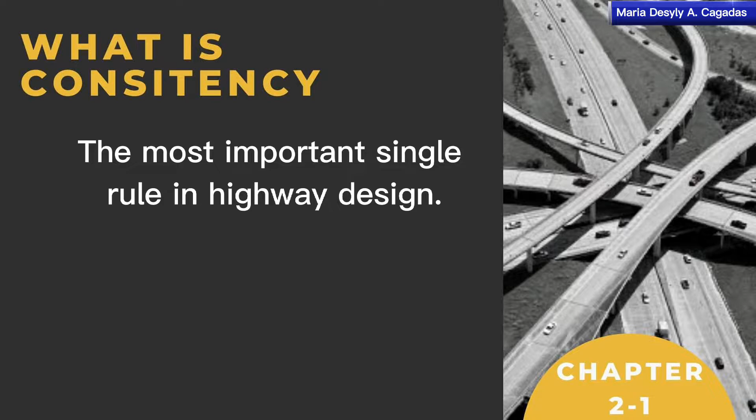Let's start with the word consistency. What is consistency? It is the most important single rule in highway design, making every element of the road conform to the expectation of every driver. Drivers expect the highway agency to provide them with clear information and guidance through a variety of road signs, and to avoid abrupt changes in traffic as well as road standards.

Let's go on to the definition and terms. AASHO, or American Association of State Highway Officials, was established in 1914 as an association of state, territorial, and District of Columbia Highway Departments and the Federal Highway Administration. The name was expanded in 1973 when the Department of Transportation was integrated into the association, renaming AASHO to AASHTO.

AASHTO means American Association of State Highway and Transportation Officials. Its engineering activities are implemented by standing committees tasked with preparing specification manuals and standards representing current highway engineering practice.

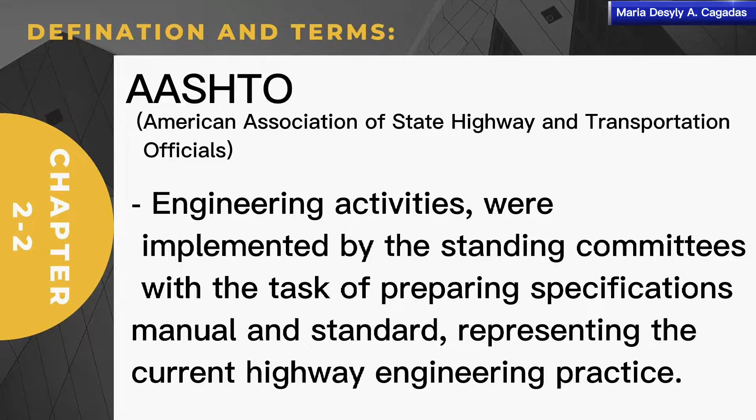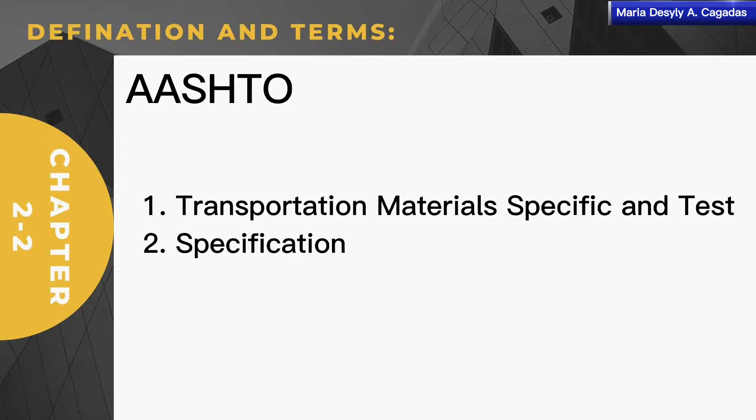The AASHTO publication includes, first, transportation materials specification and tests; second, specification of highway bridges; third, geometric design standards; and last, numerous policy statements and guidance.

Let's go on to roads and highways. These are defined as strips of land that have been cleared and further improved for the movement of people and goods. Road has a somewhat broader application in usage, while generally used to describe a public thoroughfare, it can also refer to railways.

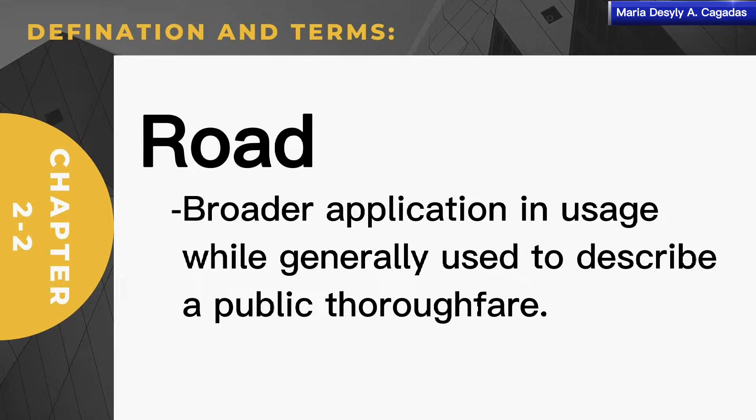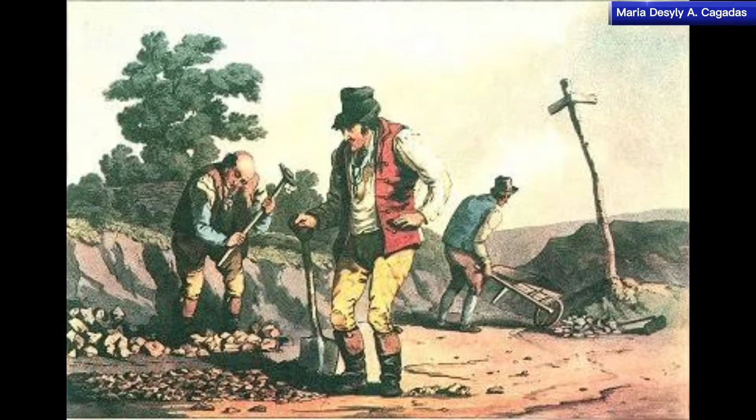Highway: the term was first used in England to describe a public road built by digging ditches on both sides and heaping up the earth in the middle, creating a level higher than the adjacent land.

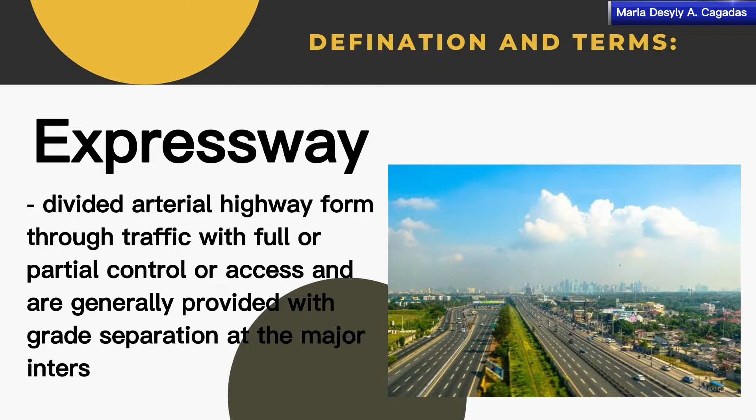The next one is expressway. It is a divided arterial highway for through traffic with full or partial control of access, generally provided with grade separation at major intersections.

Freeway is an expressway with full control of access. So what is control of access? It is a condition where the right of owners or occupants of adjoining land, or other persons, to access, light, air, or view in connection with a highway are fully or partially controlled by public authority.

There are two kinds of control of access: full control of access and partial control of access. Full control of access is where the authority to control access is exercised to give preference to through traffic by providing access connection to selected public roads.

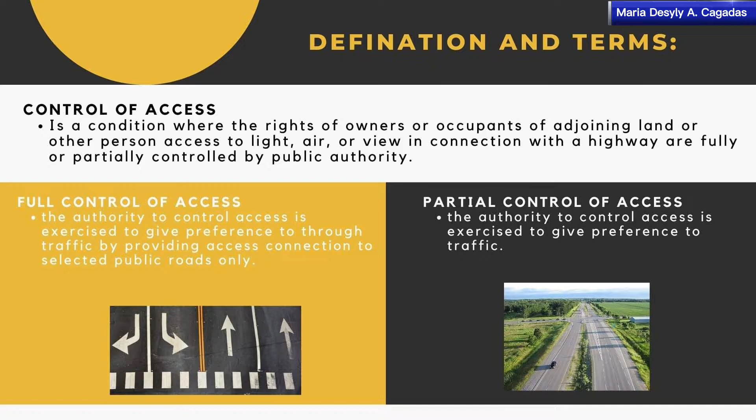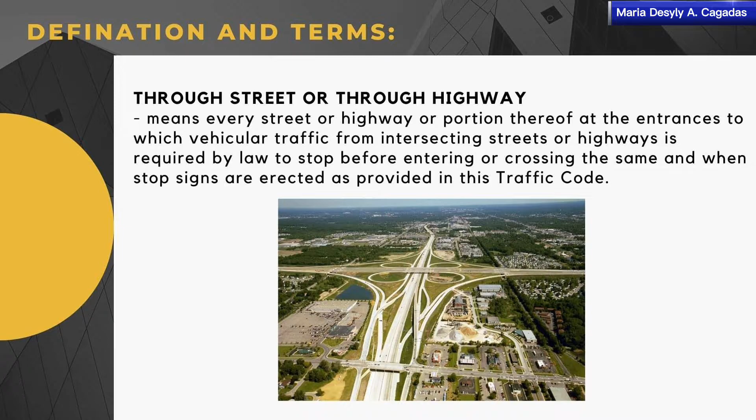Partial control of access is where the authority to control access is exercised to give preference to traffic through a street or highway. This means every street or highway, or portion thereof, where vehicular traffic from an intersecting street or highway is required by law to stop before entering or crossing, and where stop signs are erected as provided in the traffic code.

Parkway: it is an arterial highway for non-commercial traffic with full and partial control of access, usually located within a park or urban park-like development.

Arterial street: it is an arterial route that carries traffic to the nearest access point or through traffic. It is also considered a make-do substitute for a control access facility with volume exceeding about 20,000 vehicles per day.

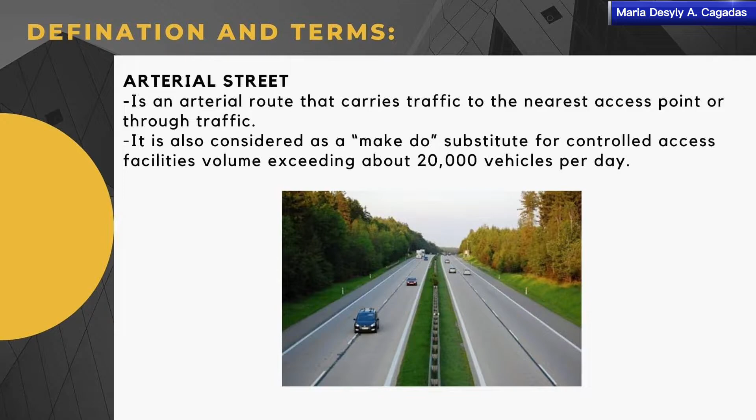Collector street: from a smaller mesh grid pattern where passengers are picked up from service streets and carried to the arterials. Large commercial enterprises or amusement facilities like drive-in theaters are mostly fronting arterial roads.

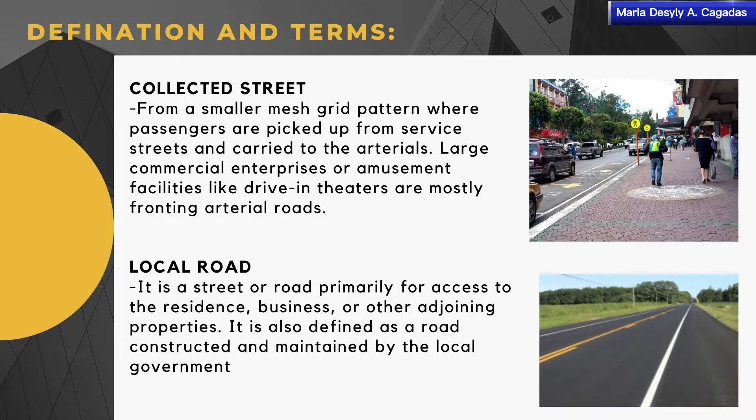Local road: it is a street or road primarily for access to residents, businesses, and other adjoining properties. It is also defined as a road constructed and maintained by the local government.

Highway capacity is defined as the minimum number of vehicles that are reasonably expected to pass a given point over a given period of time, usually expressed as vehicles per hour. There are two conditions: first, under ideal conditions, one lane can carry about 2,000 passenger cars per hour; second, a two-lane road can carry up to 1,000 passenger cars per hour in each direction.

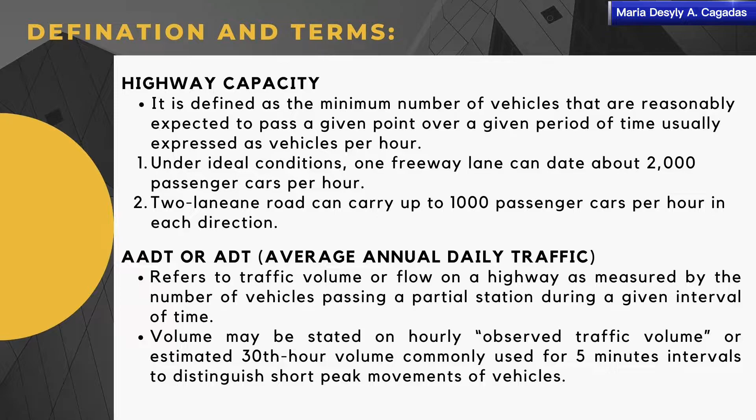AADT or ADT, average annual daily traffic, refers to the traffic volume or flow on a highway, measured by the number of vehicles passing a particular point during a given interval of time. The AASHTO practice classifies highways first as either urban or rural.

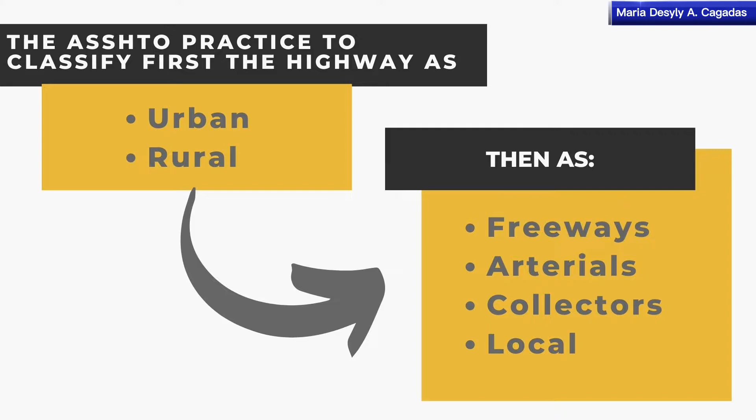Then, after that, they will classify it as freeways, arterials, collectors, or just a local road.

Cross-section of a typical highway. The cross-section of a typical highway has a latitude of variables to consider, such as: first, volume of traffic; second, character of the traffic; third, speed of the traffic; and lastly, characteristics of the motor vehicle and of the driver.

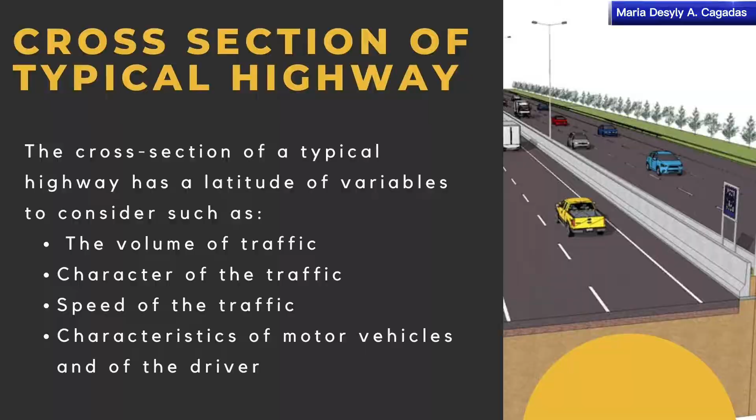What is a road shoulder? It is the portion of the roadway between the edge of the traffic lane and the edge of the ditch, gutter, curb, and side slope. The AASHTO requires that its usable pavement width and shall be strong enough to support vehicles.

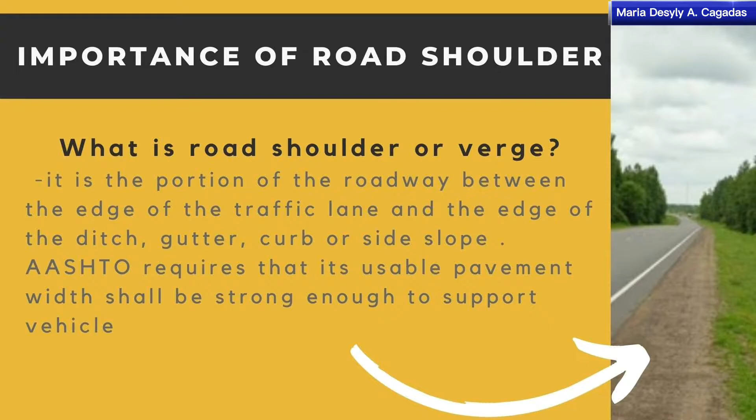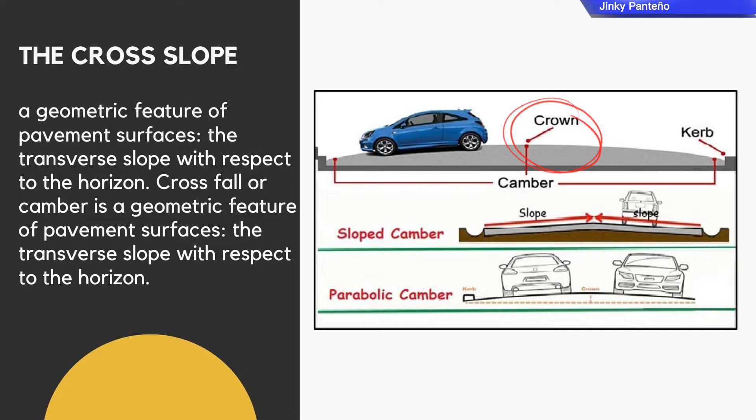To continue the discussion, my first topic would be the cross-slope design on a highway. Cross-slope is a geometric feature of pavement surfaces, the transverse slope with respect to the horizon. A straight tangent roadway segment is typically designed with normal crown for the sole purpose of providing sufficient drainage of water away from the roadway. The term crown is used to describe the top of cross slope and the percentage of the slope.

For high-type pavement, normal crown has a rooftop shape which peaks in the center of the roadway and falls away from the center line at often 1% and typical rate of 2%. This means for a roadway with 12-foot lanes, the edge of the roadway will be 0.24 feet below the elevation of the center line. This is essential for reducing the likelihood of hydroplaning.

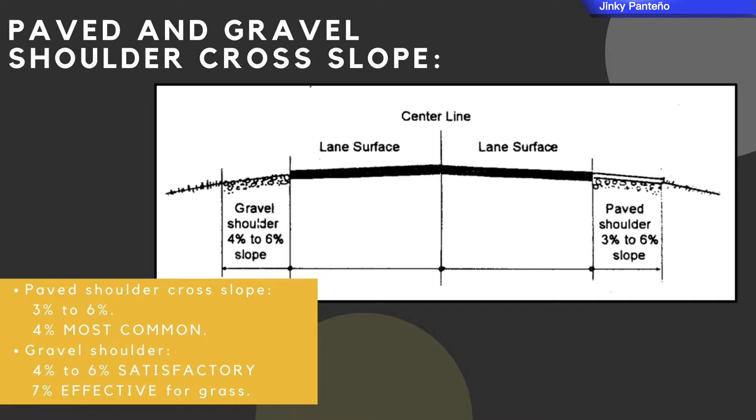As the picture shows, paved and gravel shoulder cross slopes, the side lanes of highways, have different percentages of slopes, wherein paved shoulder cross slope ranges from 3% to 6%, although 4% is the common. For a gravel shoulder, 4% to 6% slope is satisfactory and 7% slope is effective for turf grass surfaces.

On parabolic pavement sections, the parabolic crown surface makes the center line almost flat unless gutters are sufficiently deep to convey water. A combination of uniform slope with parabolic curve is used instead of the parabolic sections.

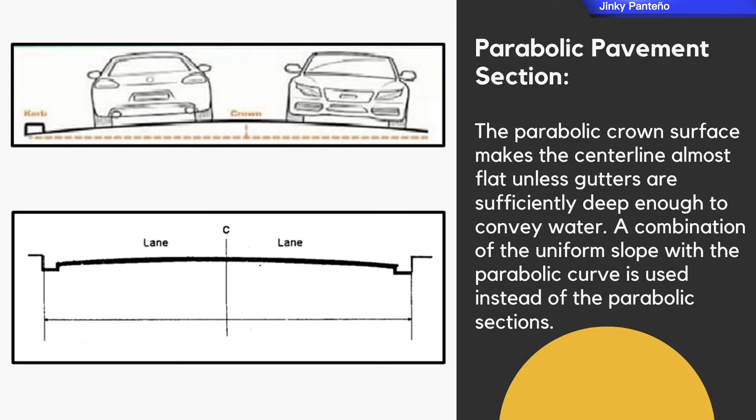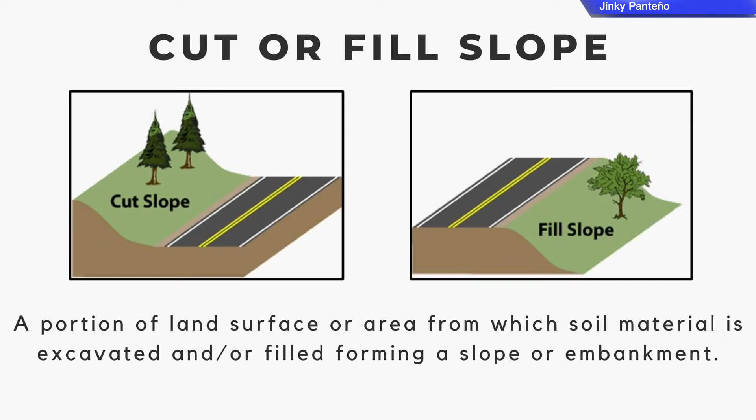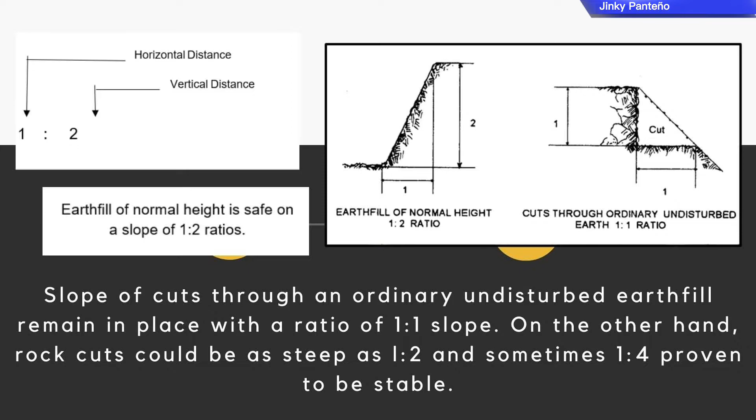Cut or fill slopes means a portion of land surface or area from which soil material is excavated and/or filled, forming a slope or embankment. Earth fill of normal height is on a slope of 1:2 ratio, meaning the first number represents the horizontal distance while the second number is vertical distance. Slopes of cuts through ordinary undisturbed earth remain in place with a ratio of 1:1 slope. On the other hand, rock cuts could be as steep as 1:2 and sometimes 1:4, proven to be stable.

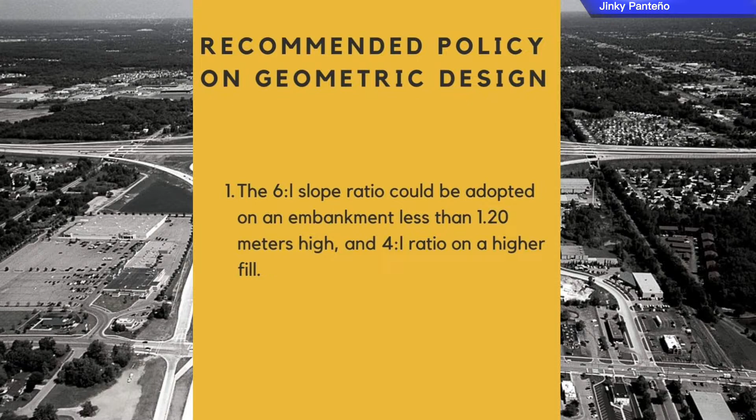There are 3 recommended policies on geometric design. Number 1, the 6:1 slope ratio could be adopted on embankments less than 1.2 meters high, and 4:1 ratio on a higher fill. Number 2, the 2:1 slope is allowed for heights greater than 6 meters. Number 3, cut slope should not be steeper than 2:1 ratio except on solid rock or special kinds of soil.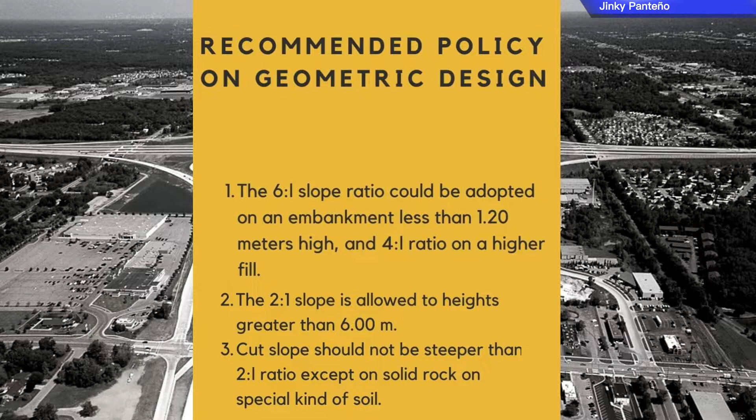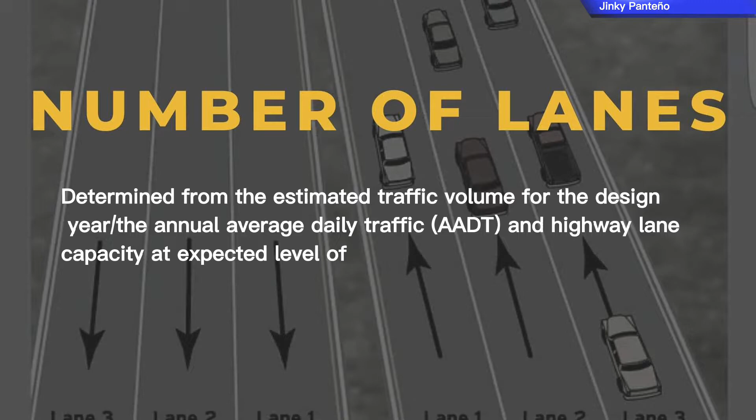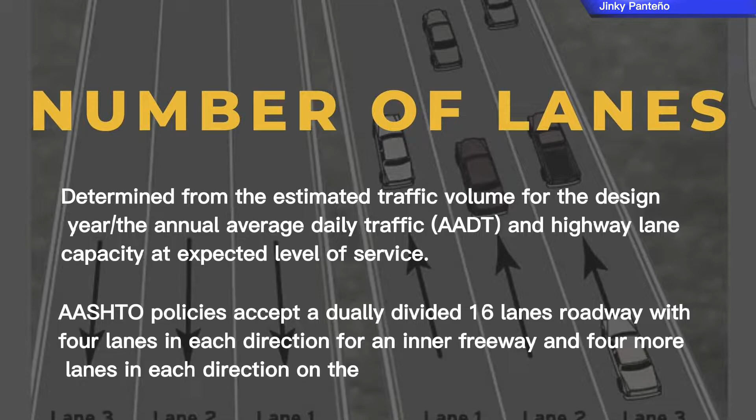Let us now proceed to the number of lanes. The number of lanes in a segment of the highway is determined from the estimated traffic volume for the design year, or the AADT, and highway lane capacity at the expected level of service. AASHTO, the American Association of State Highway and Transportation Officials, policies accept a dual-divided 16-lane roadway with 4 lanes in each direction for an inner freeway and 4 more lanes in each direction on the outside. There are some instances where a reversible lane is located at the center of freeways with unbalanced heavy traffic flow.

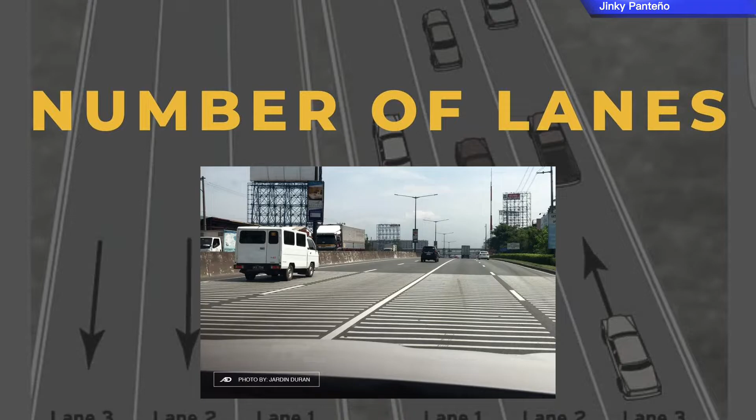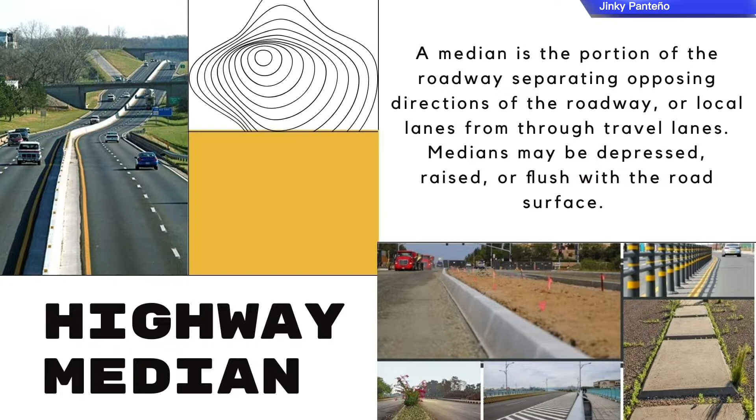Highway median. A median is the portion of the roadway separating opposing directions of the roadway or local lanes from through travel lanes. Medians may be depressed, raised, or flush with the road surface. Here are the 3 most common types of medians used in road construction. Paint lines: a median can be a paint line marked with road studs that separates 2 lanes of traffic that run parallel to each other. Such a type of median is also sometimes referred to as a median strip.

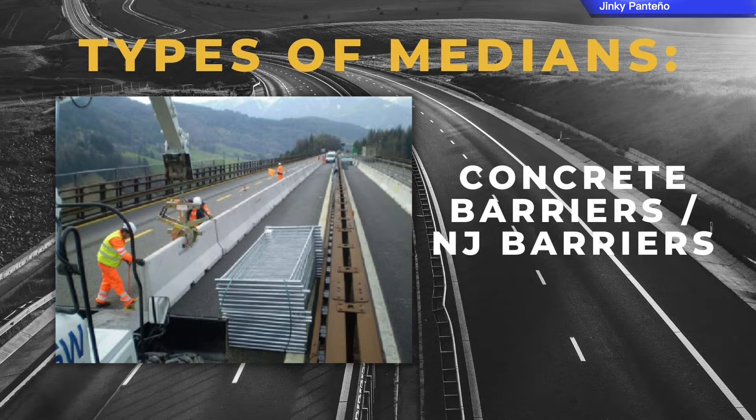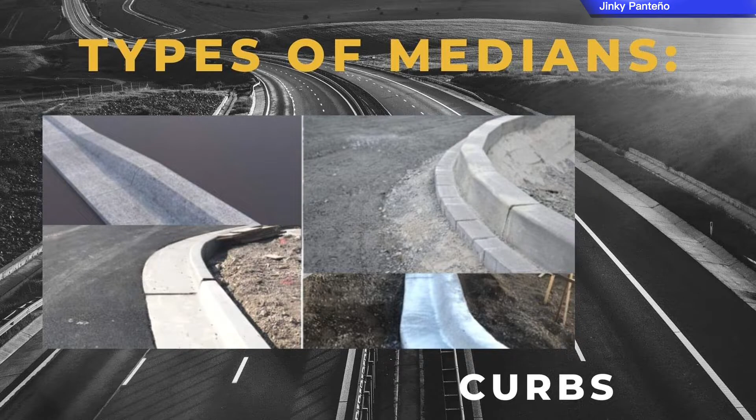Concrete barriers or NJ barriers. One popular median barrier type is called jersey barriers. These barriers, made of heavy-duty reinforced concrete, are designed to stop vehicles and other hazards from crossing over into oncoming traffic. Curbs: curbstones are commonly used as road medians, and these curbstones have to withstand several different weather elements.

Recently, medians in various forms have become an absolute requirement for highways because they offer a variety of advantages, such as allowing drivers to enter and exit highways or roads with less interruption. Medians further reduce incidences of head-on collisions.

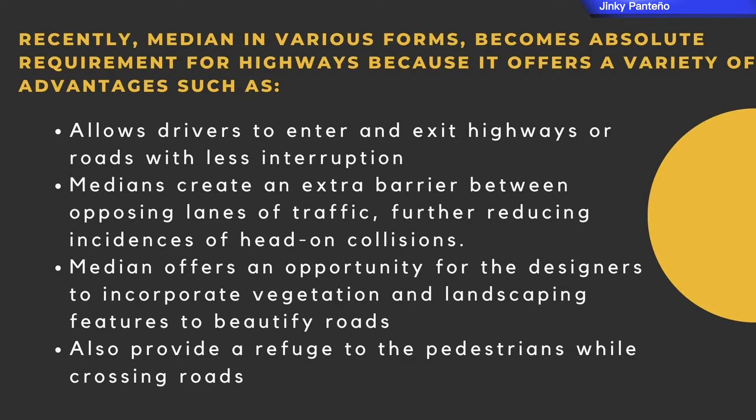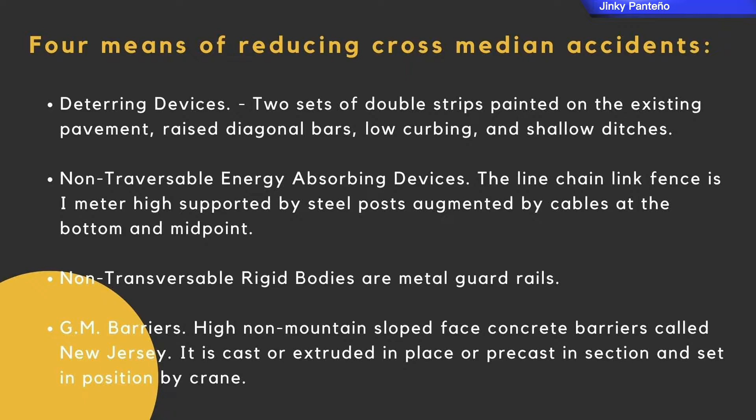Median offers features to beautify roads and also provide a refuge to the pedestrians while crossing the roads. There are 4 means of reducing cross-median accidents: the deterring devices, the non-traversable energy-absorbing devices, the non-traversable rigid bodies, and GM barriers.

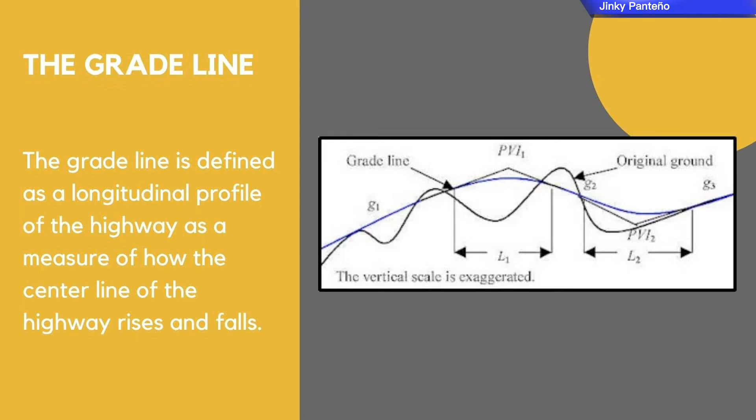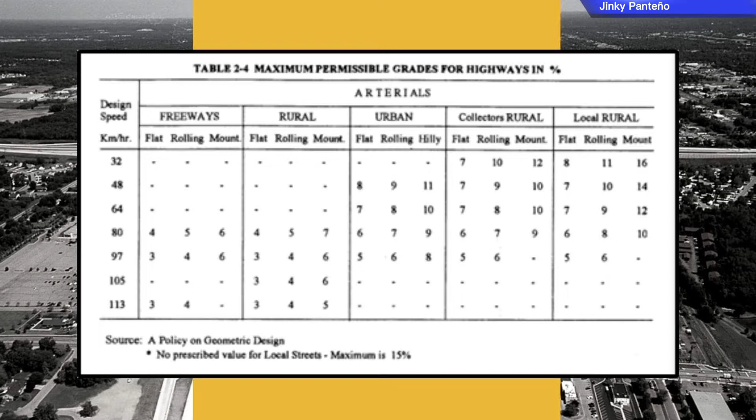Next is the grade line. Grade line is defined as the longitudinal profile of the highway, as a measure of how the center line of the highway rises and falls. The table shows the maximum permissible grades for highways in percent. So there are different grade percents on freeways, rural, urban, collectors rural, and local rural, depending on their design speed.

In laying the grade line, the designer has things to consider. Number 1, earthwork is minimal and consistently meeting sight distances in relation to grade line. Number 2, in mountainous areas, the grade line must be considered, balancing excavation against embankments to get the minimum overall cost. 3, in flat areas, the grade line is set almost parallel to the ground surface but sufficiently above the ground for drainage purposes.

Number 4, undesirable native soil should be provided with sufficient covering. And number 5, grade line elevations along a river or stream are governed by the expected level of flood water.

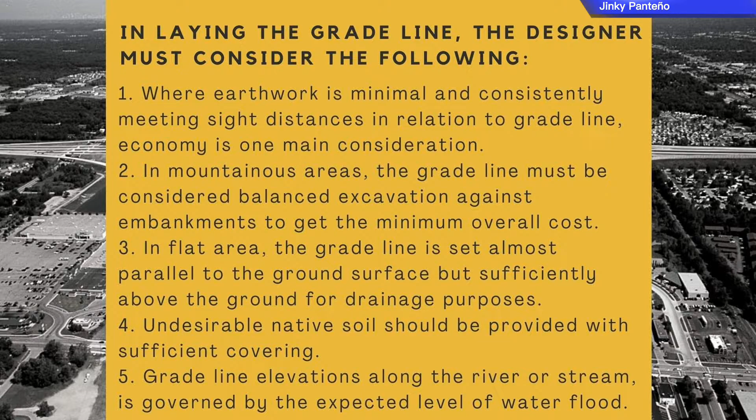Hello, I'm the next reporter, and I'm talking about vertical curve over crest. So there are two curves, crest and sag. So crest is like a hill. So, requirements of the vertical curve over crest. All curves should not be shorter than the established minimum over crest. This is governed by the sight distance requirements, but sometimes riding may demand longer curves than sight distance. Some designers prefer no vertical curve to be shorter than 300 meters.

AASHTO suggested that the minimum curve length varies with the design speed in meters. The distance equals 8 times the velocity in kilometers per hour. So the intermediate point offset is obtained by the maximum correction times the horizontal distance from the end of curve to the point squared, over one half of the length of curve squared.

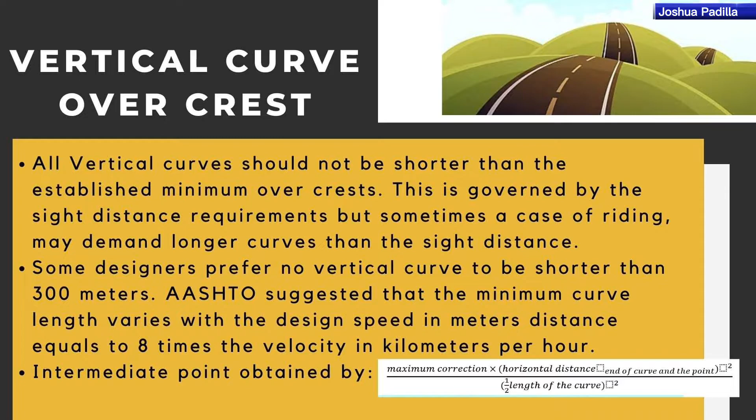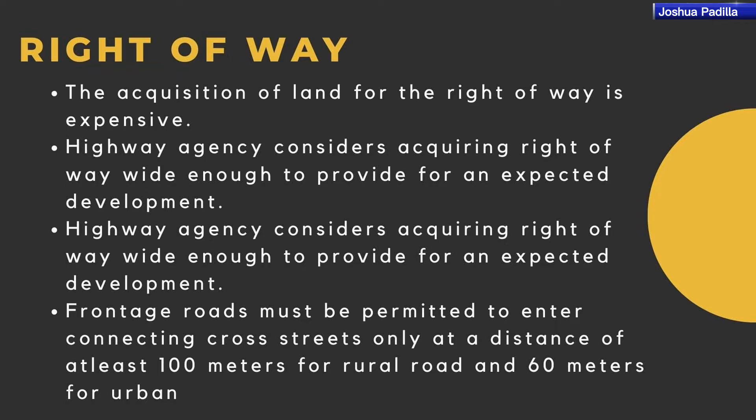So next is the right of way. The right of way is the width of your road. The acquisition of land for right of way is expensive. Highway agency considers acquiring right of way wide enough to provide for expected development. When expressways and freeways are successful, it closes the roadway from direct access to adjoining property. So frontage roads must be permitted to enter connecting cross streets only at a distance of at least 100 meters for rural and 60 meters for urban.

Next is stopping sight distance. What is stopping sight distance? Stopping sight distance is the shortest distance that a driver can see the top of an object 15 cm above the surface. Elements of stopping distance: the distance traveled after the obstruction or object is seen before the driver applies the brake, and the second distance is consumed while the driver applies the brake for the vehicle to stop.

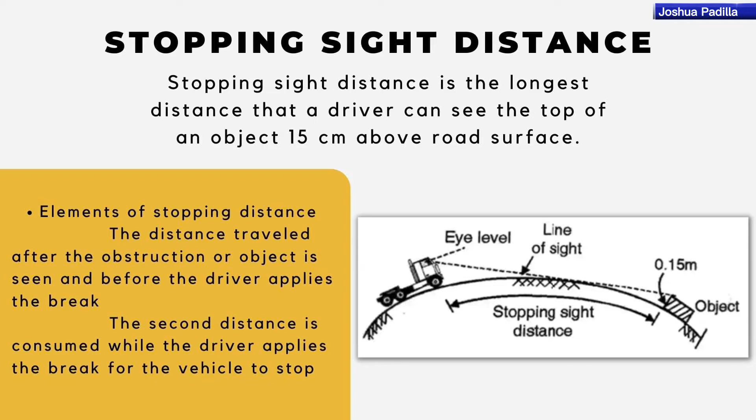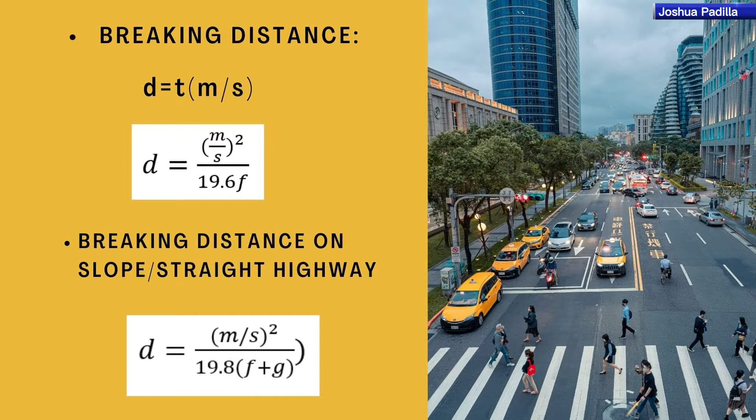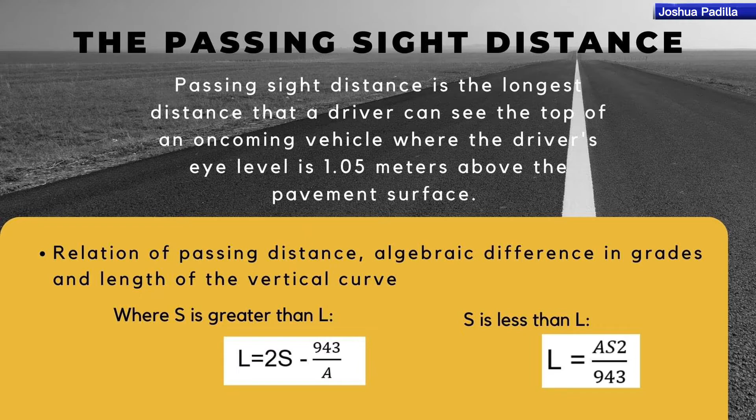The passing sight distance. Passing sight distance is the longest distance that a driver can see the top of an oncoming vehicle, where the driver's eye level is 1.05 meters above the pavement surface. A relation of passing sight distance, algebraic difference of grades, and the length of vertical curve: remember that when S is greater than L, L is equal to 2S minus 943 over A. If S is less than L, L equals AS squared over 943. F equals V squared over gR minus e. So this is the table of the minimum passing sight distance for the two-lane highway.

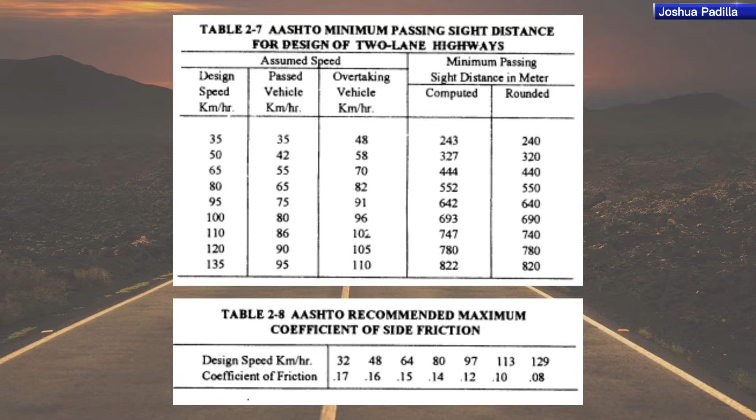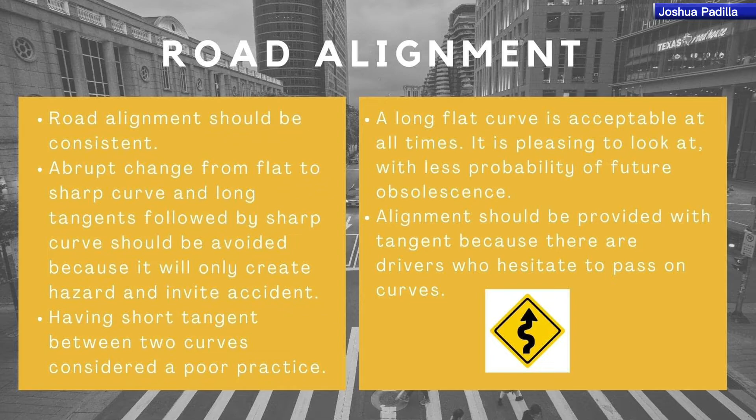Next is the table of the recommended maximum coefficient of side friction. Road alignment should be consistent. Abrupt change from a flat to a sharp curve, or a long tangent followed by a sharp curve, should be avoided because it will only create hazard and invite accidents. Having a short tangent between two curves is considered a poor practice. A long flat curve is accepted at all times. It is pleasing to look at, with less probability of future obsolescence.

Good day everyone, I am Tiffany Abuel. I will be discussing the circular curves, superelevation runoff, widening on curves, islands, and lastly the types of interchange.

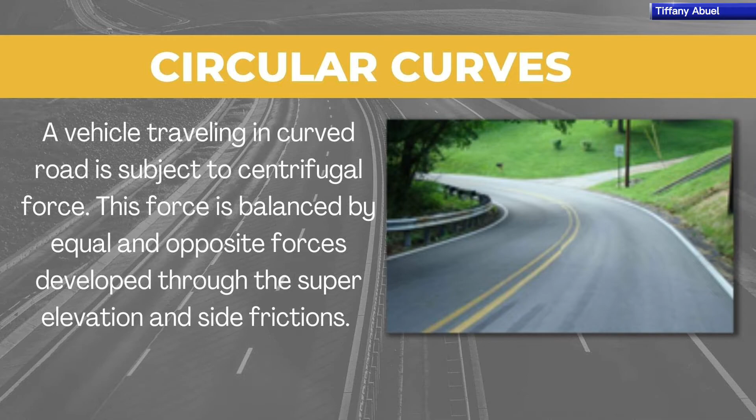So the circular curves: a vehicle traveling on a curved road is subject to centrifugal force. This force is balanced by equal and opposite forces developed through the superelevation and side friction. However, neither the side friction nor the superelevation could exceed the maximum, which controls and limits the sharpness of curves with a prescribed design speed. What is superelevation runoff? Curved sections of roadways are usually superelevated.

Provision for gradual changes from one point to the other should be considered. The runoff length is to vary with the super elevation rate and the design speed, with the minimum set for appearance and comfort to riders. And the center line of each individual roadway at profile grade is maintained while raising the outer edge and lowering the inner edge to attain the desired super elevation.

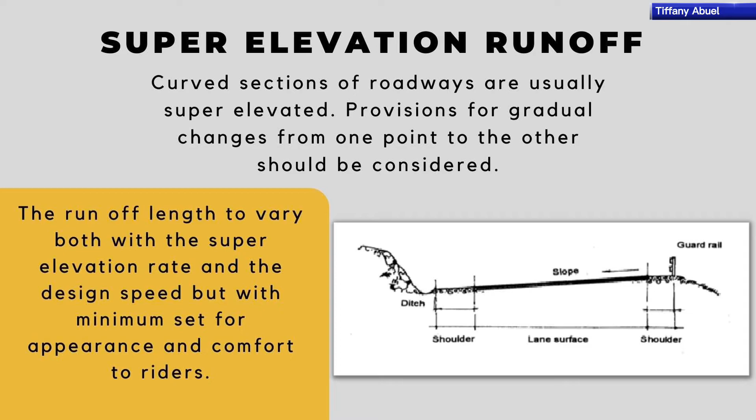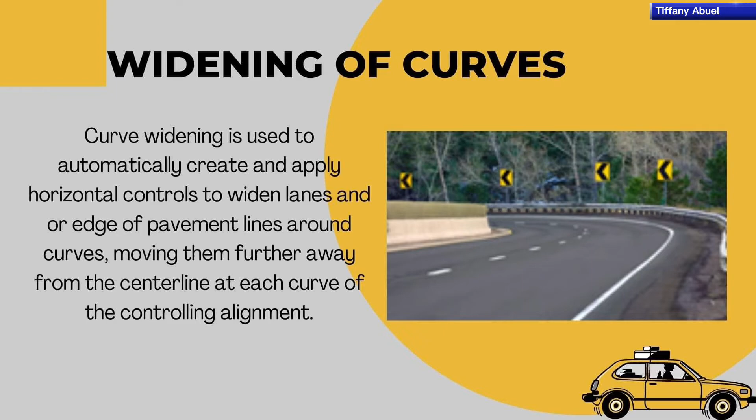A provision for a wider roadway is necessary on a sharp curve for two-lane pavement for the following reasons. Number 1, to force the drivers to shy away from the pavement edge. 2, to increase the effective transverse vehicle width for the non-tracking of the front and the rear wheels. 3, to give additional width due to the slanted position of the front wheel to the road center line.

Number 4, for a 7.20 meters wide roadway, an additional width of 30 centimeters is necessary on an open curved highway. An island is a defined area between traffic lanes for control of vehicle movements and for pedestrian refuge. Within an intersection, a median is considered an island. This definition makes evident that an island is no single physical type.

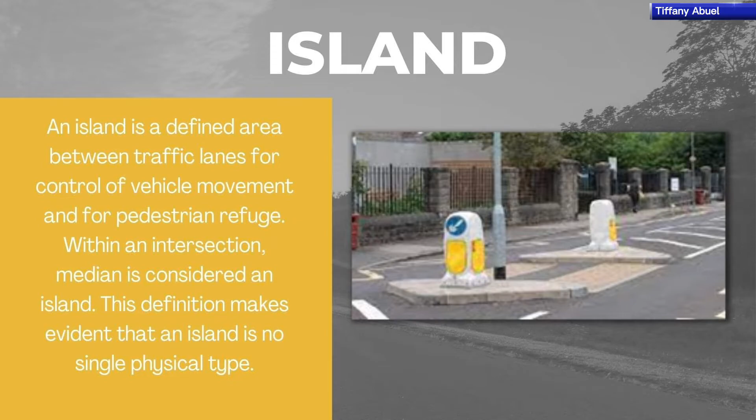Islands are included in the design of intersections for the following purposes. We have the separation of vehicular flows, separation of conflict, reduction in excessive pavement areas, regulation of traffic and indication of proper use of intersections, arrangement to favor a predominant turning movement, and last, location of traffic control devices.

By channelization, funneling is also effective in preventing overtaking and passing in conflict areas. A well-studied signalization is an important adjunct to channelization that regulates the vehicle speed, and prohibited turns are prevented. Refuge may be provided for turning or crossing vehicles and pedestrians. The driver has to face only one decision at a time, hence conflict can be avoided. It provides location for the traffic control devices like signs.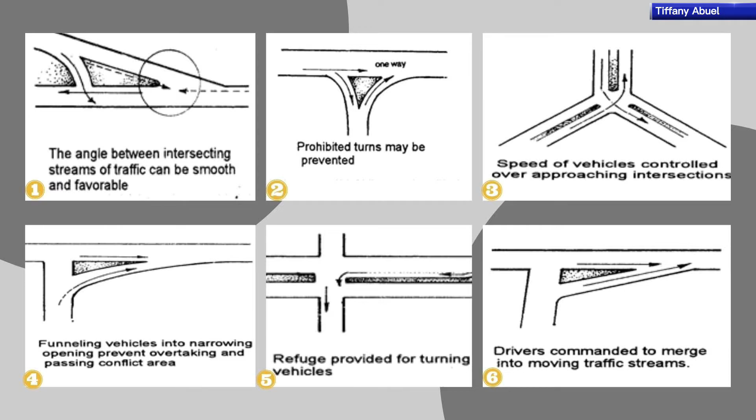Without confining vehicles to a definite location and a proper route for vehicles and pedestrians, everyone's action could not be predicted by others, and these are usually the main cause of confusion which leads to accidents.

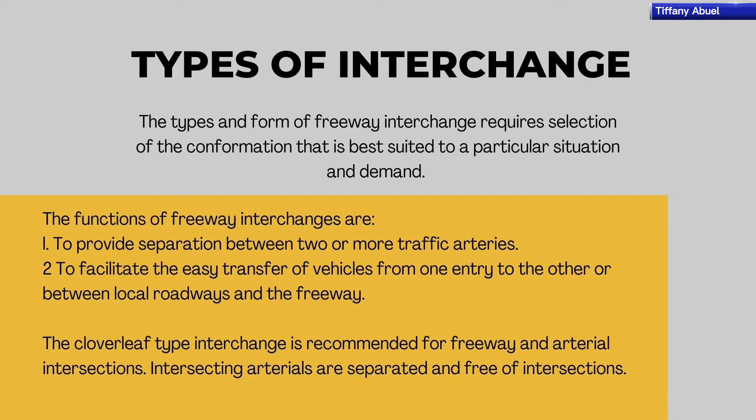Next, the type of interchange. The types and forms of freeway interchange require selection of the configuration that is best suited to a particular situation and demand. The functions of freeway interchanges are: number 1, to provide separation between two or more traffic arteries. 2, to facilitate the easy transfer of vehicles from one artery to the other or between local roadways and the freeway. The cloverleaf type interchange is recommended for freeway and arterial intersections. Intersecting arterials are separated and free of intersections.

Objections to the cloverleaf interchange design: number 1, it requires a large area of land. 2, at higher design speed, more time is consumed just to traverse the longer loops. 3, vehicles making a left turn execute a 270-degree right turn and travel a greater distance, becoming very unpleasant and hazardous due to the sharp curves and steep grades. 4, vehicles leaving to the curved loop in one quadrant conflict with those entering the adjacent loop from the through roadway.

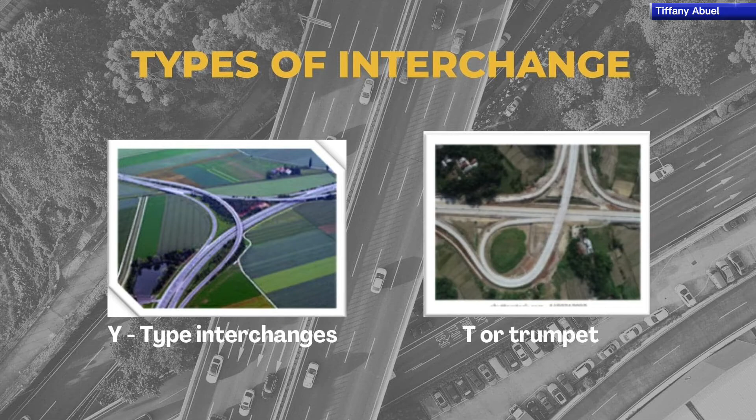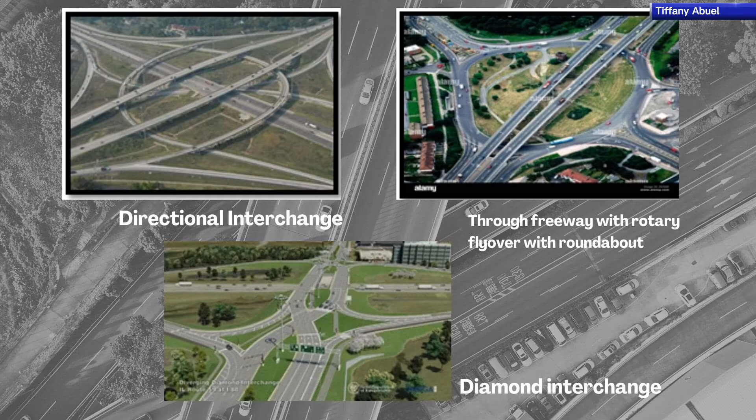So these are the types of interchange in designing the highway. We have here the Y type of interchange, T or trumpet, directional interchange, through freeway with rotary, flyover with roundabout, diamond interchange, partial cloverleaf, and the cloverleaf.

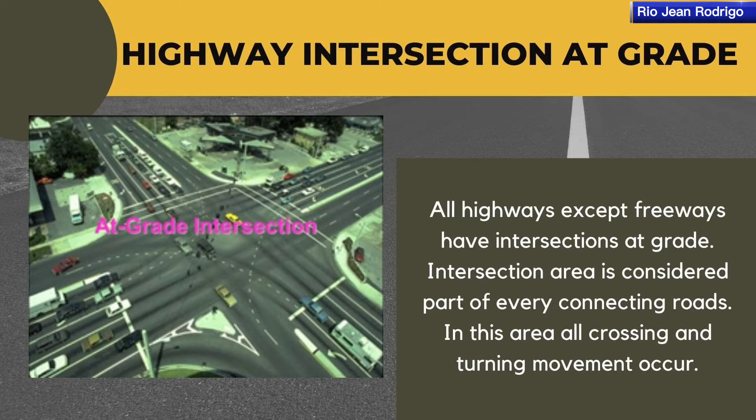Number 1. For a right angle intersection with little traffic, the use of a street sign is more than sufficient. Number 2. A Y intersection or other related configuration where vehicles meet at unfavorable angles may require channelization. Number 3. The flare design will involve the following. A.

Widening the entering traffic lane to allow deceleration of the car and clear of through traffic. Letter B. Widening the leaving lanes to provide acceleration and merging from the traffic streams.

Number 4. Intersection must accommodate large trucks and the radius of all curves must be sufficient enough to accommodate them. A careful traffic count and projected future improvement must precede the design of all critical sections. Based from the data gathered on traffic count, the lane capacity could be determined, including the number of lanes to

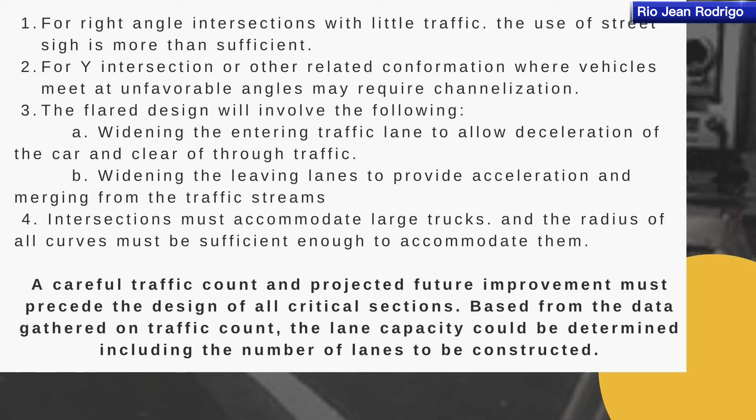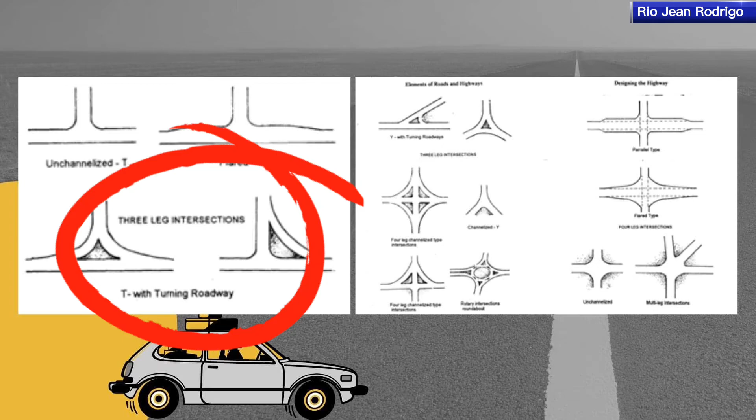be constructed. As you can see in figure 2.31, intersection at grade, we have the unchannelized T, flared T, and the T with turning roadway. An unchannelized intersection is the simplest kind, where two roads simply cross each other like a plus symbol or a T, with nothing specifically dividing traffic in one direction or on a cross street from traffic going the other direction.

While the flared T intersection expands the cross-section of the street, main cross or both. The flaring is often done to accommodate a left turn lane so that left-turning bicycles and motor vehicles are removed from the through traffic stream to increase capacity at high volume locations and safety on higher speed streets.

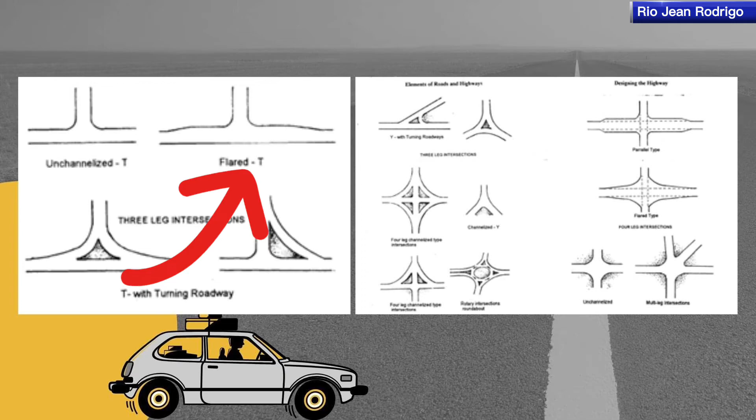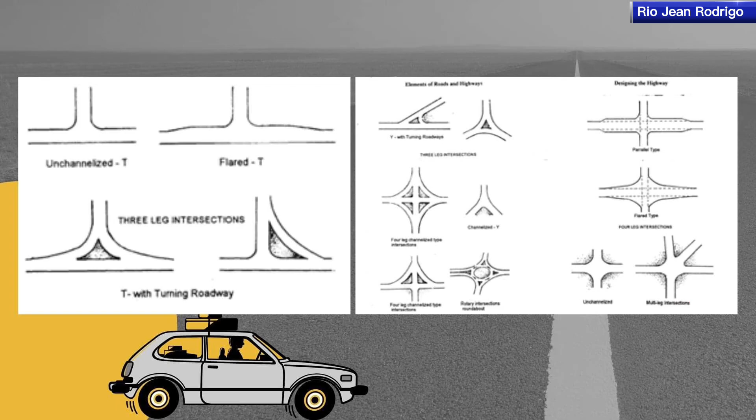On the other hand, in figure 2.32, intersection at grade, we have the different types of intersection. We have the Y with turning roadways, the three-leg intersection, the four-leg channelized type intersections, the channelized Y, the rotary intersections roundabout. We also have the parallel type, the flared type, and lastly, we have the four-leg intersections, the unchannelized, and the multi-leg intersections. Next is the freeway entrance and exit.

The overall effectiveness of the individual freeway systems is governed by the flow characteristics of vehicles and the driver's behavior near on and off the channel. On a single lane on ramp, vehicles flow into the outer continuing freeway lane. The design is either a taper blending into the through lane or a parallel auxiliary lane parallel to the through lane. In either case, sufficient length is required to allow the vehicles to accelerate and merge into the ongoing vehicle stream at a speed near that of the freeway.

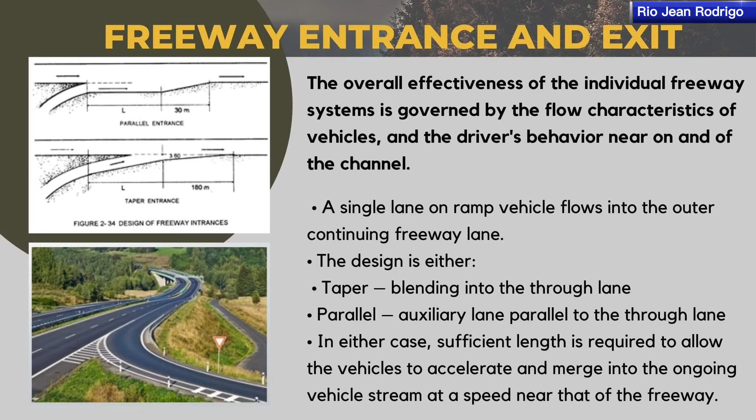In table 2.12, sampling of minimum for freeway on and off ramps. Freeway speed kilometer per hour, on ramp and off ramps. On ramp or off ramp design speed kilometer per hour: we have stop, 20, 30, 40, and 50. L stands for the length of ramps in meters. Freeway speed kilometer per hour on ramp: we have 80, 95, and 110.

For 80, the minimum is 228, 189, 150, 48, and 51. For 95, we have 350, 321, 273, 177, and 51. And for 110, we have the minimum of 477, 450, 400, 303, and 174. For the off-ramps, we have a freeway speed kilometer per hour of 80, 95, and 110.

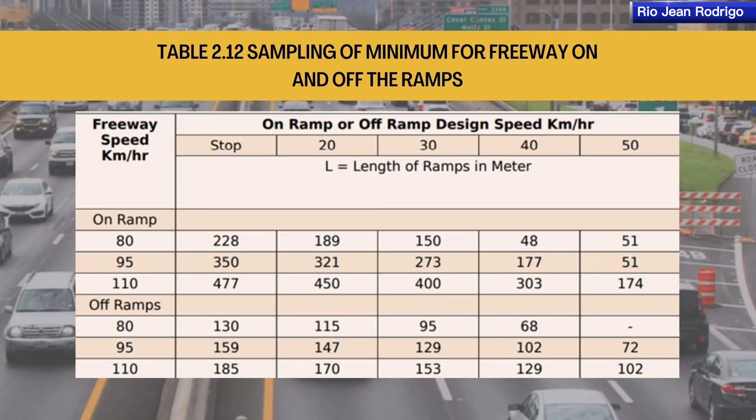For 80, the minimum is 130, 115, 95, and 68. For 95, we have 159, 147, 129, 102, and 72. And lastly, for 110, we have 185, 170, 153, 129, and 102. For the exit, vehicles leaving the freeway need distance to accelerate and clear of the flow of

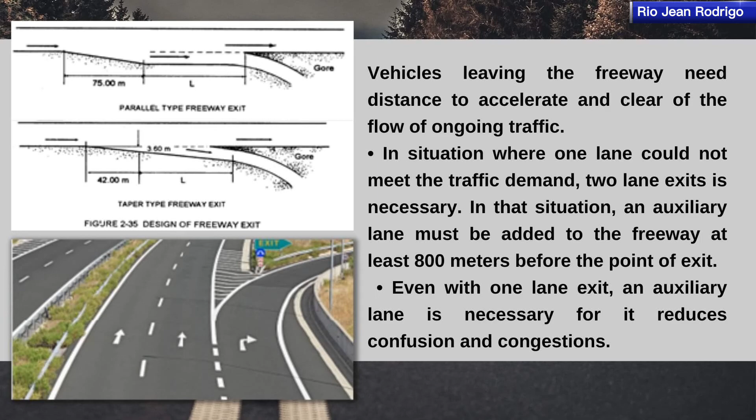ongoing traffic. In situations where one lane could not meet the traffic demand, a two-lane exit is necessary. In that situation, an auxiliary lane must be added to the freeway at least 800 meters before the point of exit. Even with a one lane exit, an auxiliary lane is necessary for it reduces confusion and congestion. Next on the line is the railroad highway separation.

The main question asked on a railroad and highway separation is which one is to go over, the railroad or the highway? If the highway is to go over the railroad, the structure itself is lighter and the highway load is much smaller than the railroad loads. With regards to the vertical clearance height, the railroad requires a minimum of 7 meters as against 4.80 meters clear distance above the highway.

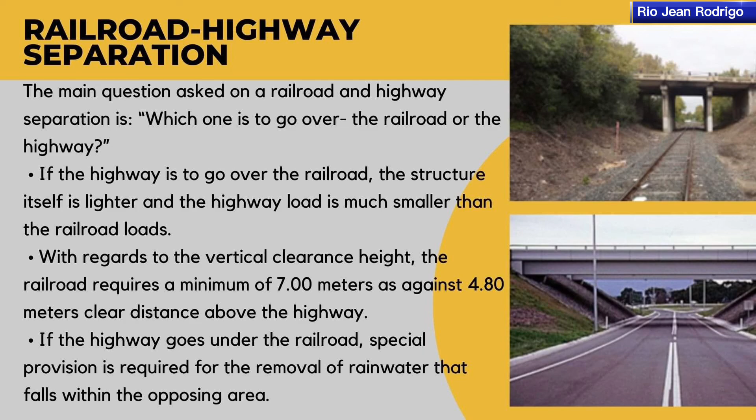If the highway goes under the railroad, special provision is required for the removal of rainwater that falls within the opposing area. If the groundwater is high in the vicinity of the crossing, the roadway must be sealed against leakage and be made heavy enough to prevent it from floating.

The last one is the bicycle lane. Bicycle use is now becoming popular due to the energy crisis and traffic problems. It requires a separate road for the riders that is entirely separate from the vehicular traffic. The design speed is 20 to 30 kilometers per hour for flat sections. The width is 2 meters minimum for two-way travel. The grade of the lane is 5% maximum on short distances.